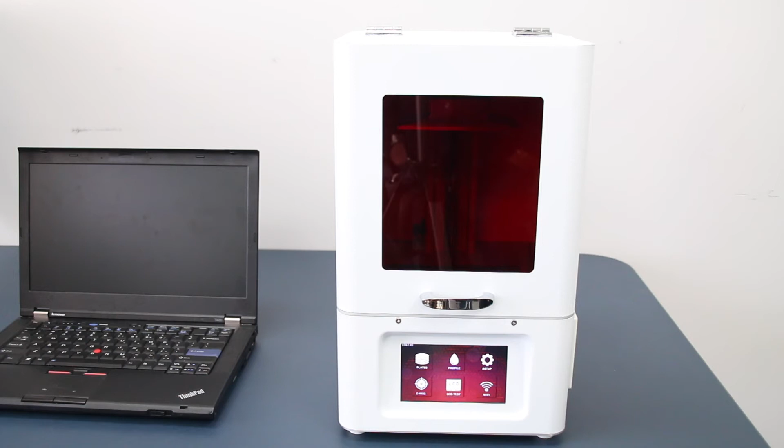Hello everyone, today we're going to show you how to use a Phrozen Sonic 3D printer.

You can connect your printer to your network in two ways: directly with an Ethernet cable, or wirelessly, which is a much easier setup. Once you turn on your printer, you will see 6 icons. Click on Wi-Fi, click on your network, type in your password, enter, and then press connect. You should see a successful message pop up.

To make sure the 3D printer is fully functional, we are testing the LCD screen.

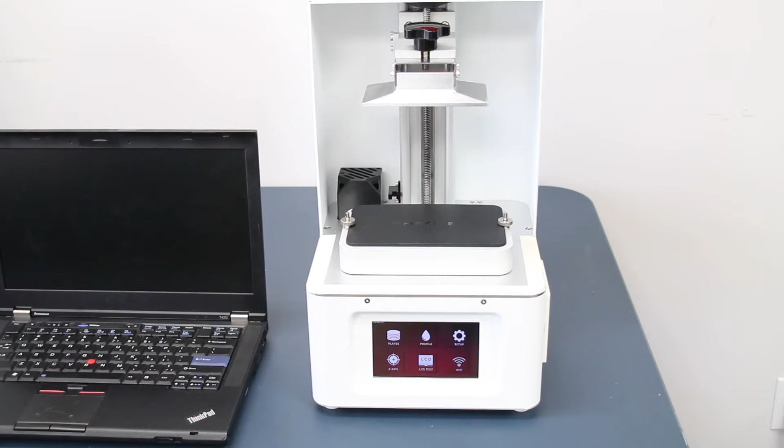To remove the vat, simply untighten the knobs and pull the vat up.

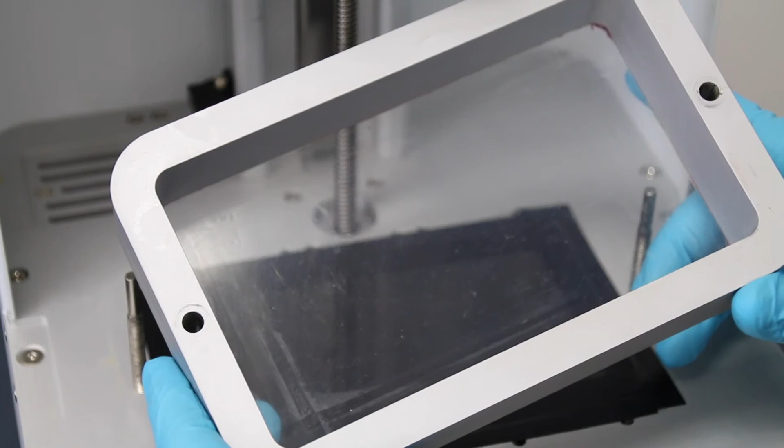Ensure your film is transparent. Ours is used but definitely usable. Once it starts fogging up, you may want to consider replacing the film. Avoid using any sharp tools on the Teflon film to prevent any leakages.

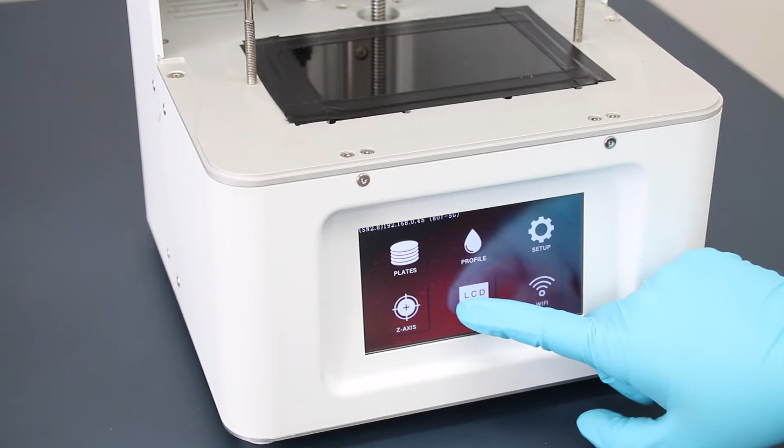Make sure you don't stare directly into the LCD screen and wear protective eyewear. Click on LCD test and click the white square in the middle.

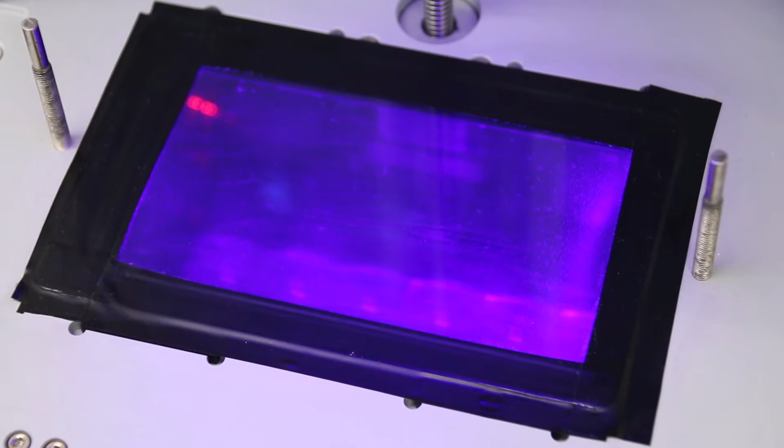Remember, the LCD screen is very fragile. Do not use any sharp tools on the surface of the screen. The LCD is also consumable, so over time it would wear down and would need to be replaced.

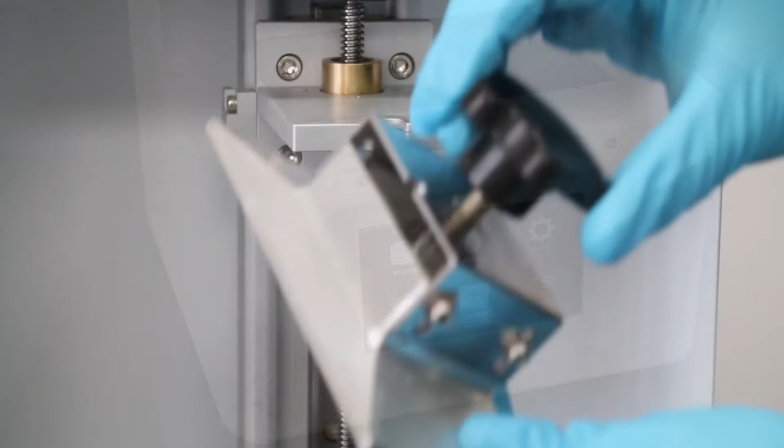To insert the build plate, always make sure the semicircle is facing away from you when placing it back in.

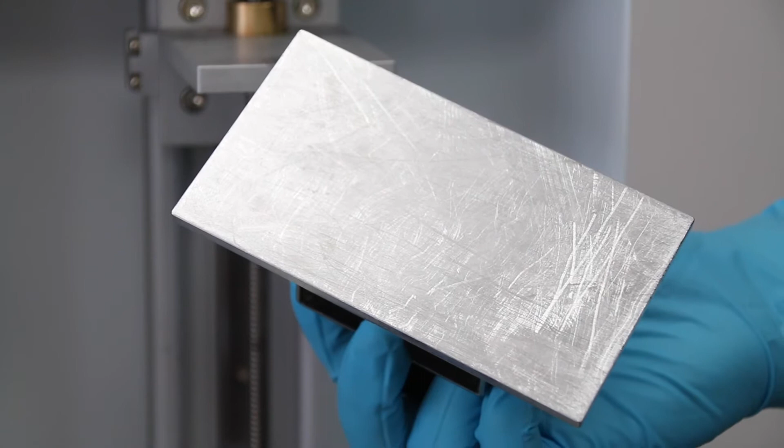Make sure you keep the surface of the build plate free of any debris. You wouldn't want anything left over on the build plate pushing onto the LCD screen. Remove all prints and make sure nothing is left over on the build plate.

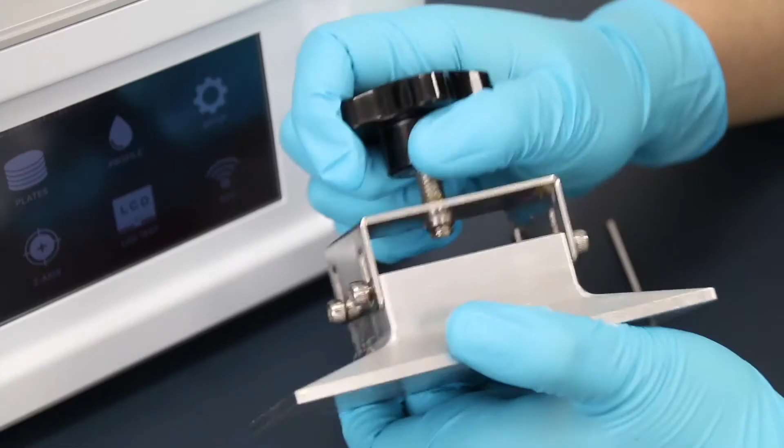Next, we're going to calibrate the build plate. Start by loosening all 4 screws of the build plate. Ensure that every screw is loosened as shown in the video. It should be a smooth transition moving it up and down.

This is a very important part of the calibration. Make sure the build plate is all the way down as shown in the video. Slide it in and tighten it up with the knob. Make sure the build plate is securely in.

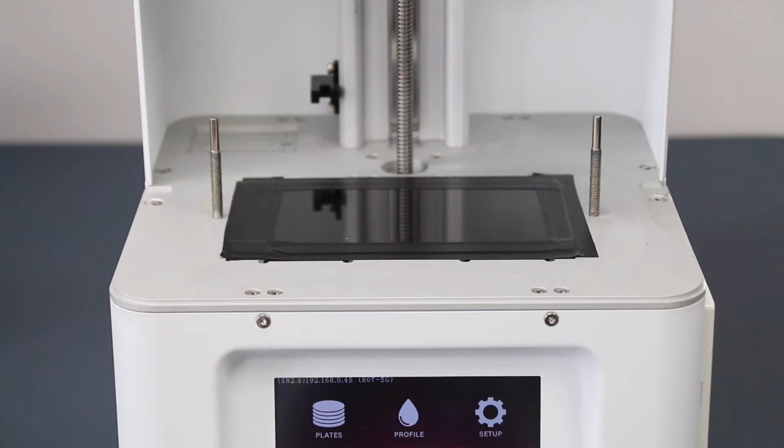Place a piece of paper on the LCD screen. This will prevent any damages on the screen. Go to the touchscreen, click on Z axis, click on the circle between the up and down arrows. Press next and the build plate will start moving down.

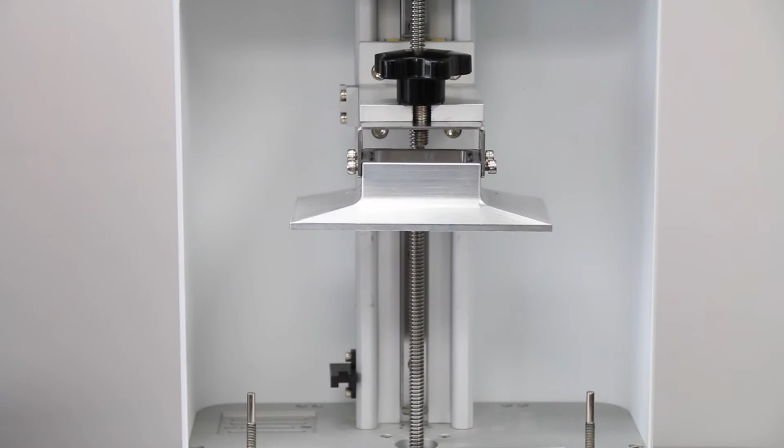Tighten the screws opposite from each other. Start with one corner, then do the opposite corner on the other side. Do this for all 4 screws.

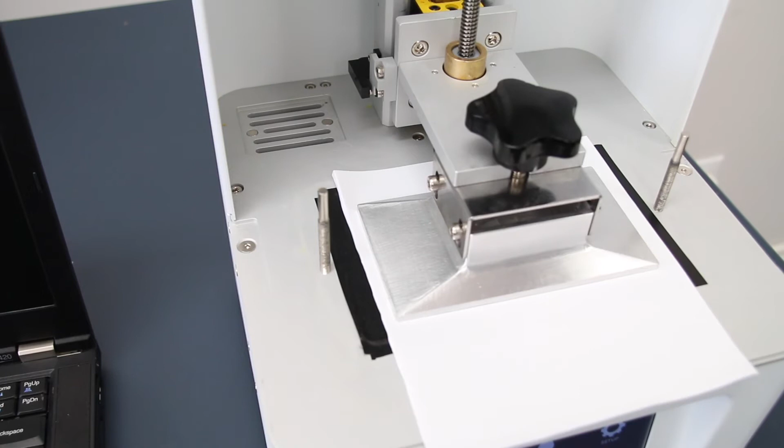The build plate will adjust itself accordingly. Give the paper a slight yank to ensure it is nicely secured. If the paper is loose, redo the calibration. Once everything is tightened, go back to the touchscreen and press done. Now the build plate will start moving up and return to its original position.

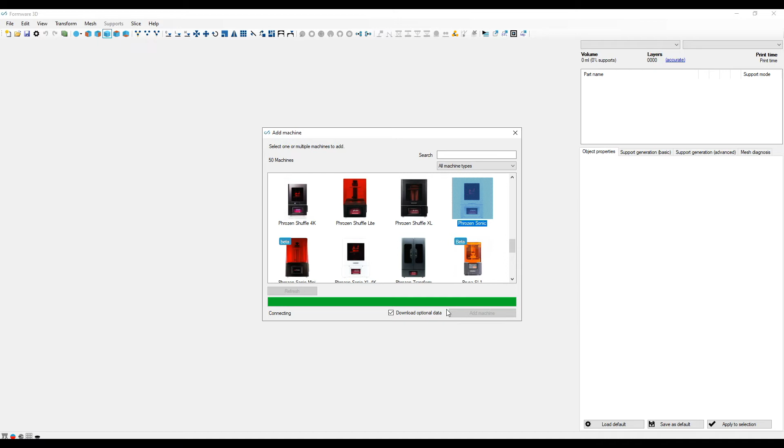Next, we're going to dive into the software. Open the software, choose your language, select which printer you have. For us, we have the Phrozen Sonic. Choose File, click Open, then choose your STL.

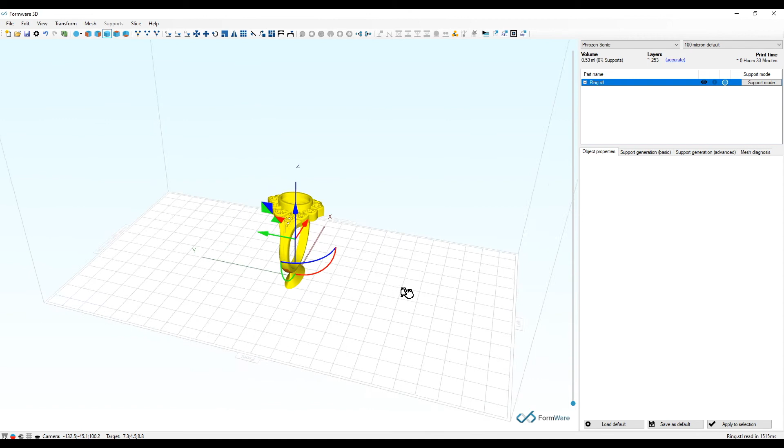I imported a simple ring and added a gate, because it's better than adding multiple supports under the ring. Right click to change the view, hold shift and hold right to pan, scroll on the mouse to zoom in and out. Select Object to move. The 3 buttons with the down arrows are for positioning the object on the Z axis.

The first button, Move to 0mm, allows you to place it directly on the build plate, typically what you want. The other 2 options allow you to place it on optimal levels for supporting. For now, we just want to make sure your STL file is directly on the build area.

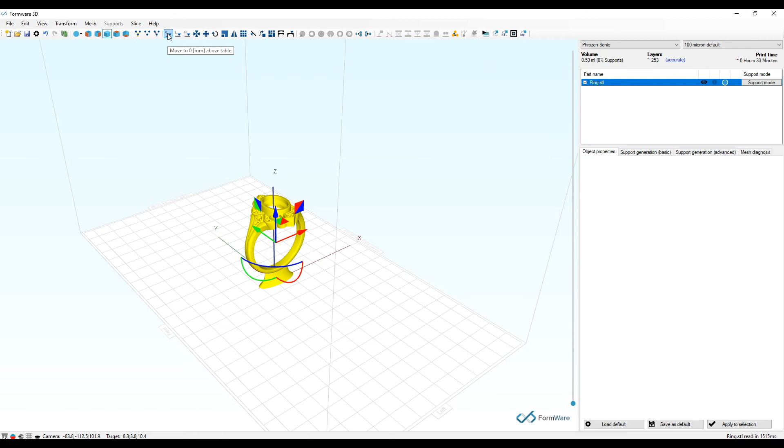So start by using the first button. To add supports, go to the support mode. Use Generate Supports to automatically make supports. There are plenty of options below to customize the automatic supports.

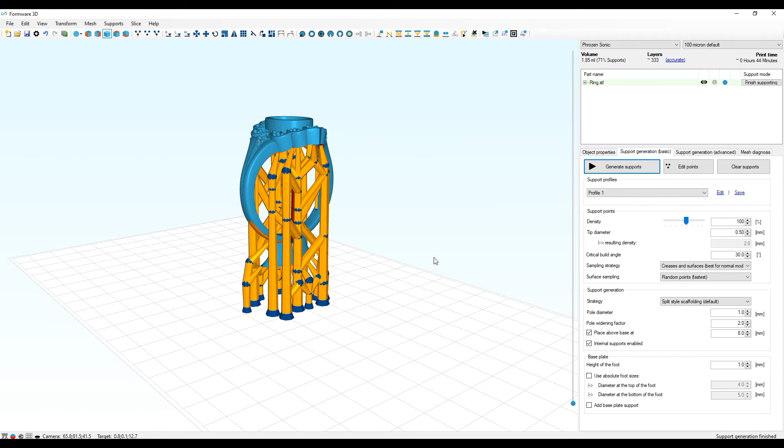As you can see, there are supports everywhere and they are not necessary. Automatic supports add supports to where they believe it is necessary. It's not the best tool to use when you have a gate. You can always reduce the amount of automatic supports with the tools below.

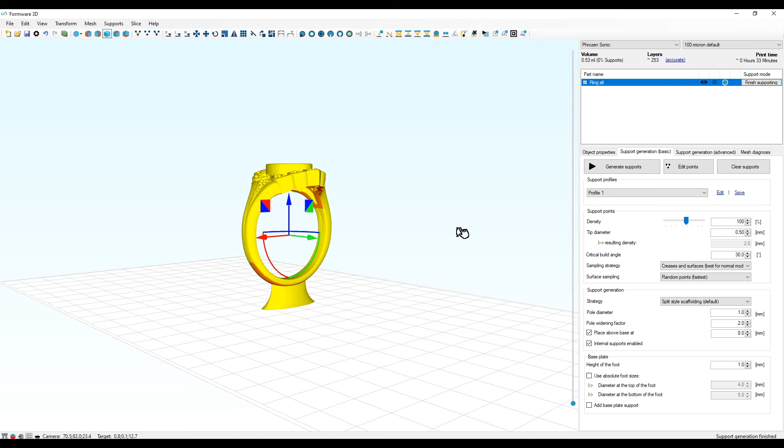I would rather add supports manually, so click Clear Supports and click to move to 0mm. Adding supports manually typically is better because you have more flexibility and control. A handy tip is to use the rail to scroll up and down on the object to see where islands are. Scroll to the point where islands are, so you know you need to add supports there.

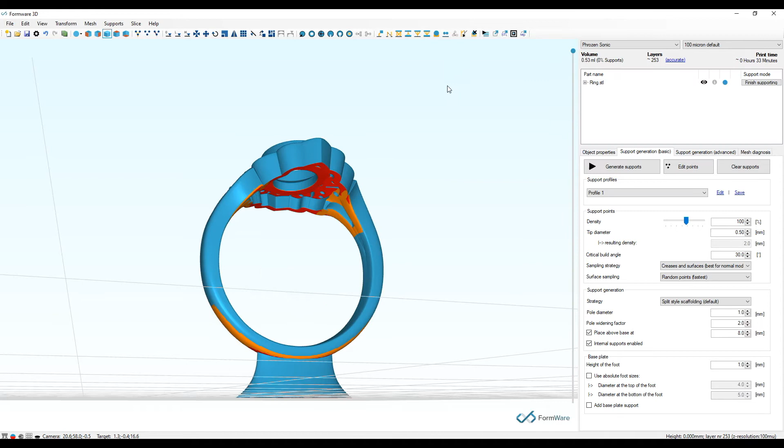To add supports manually, go to the top and select Single Support. Make sure the object is flat because we have a gate. There are also color indicators to where you need to add potential supports. Red is a strong indicator of requiring support. We know where the islands are located, so we only need 2 supports. Press Enter on your keyboard to confirm supports.

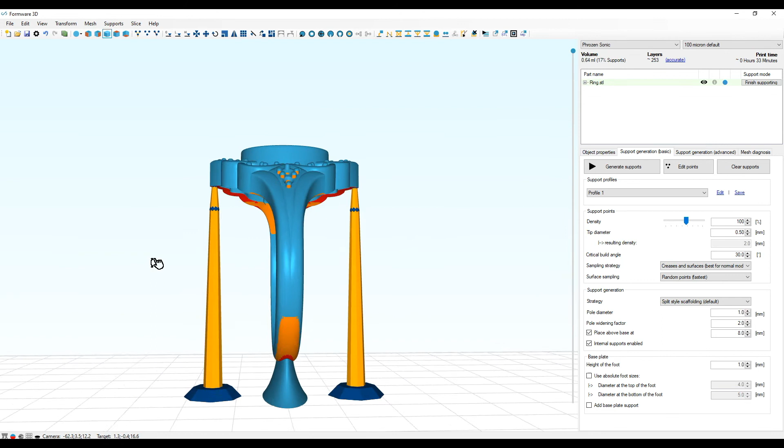I'm going to delete the current supports by pressing Delete on my keyboard. There is a handy preview tool on the bottom left corner. It should show you white lines around the object and a preview of where your supports are going to be. Once again, press Enter.

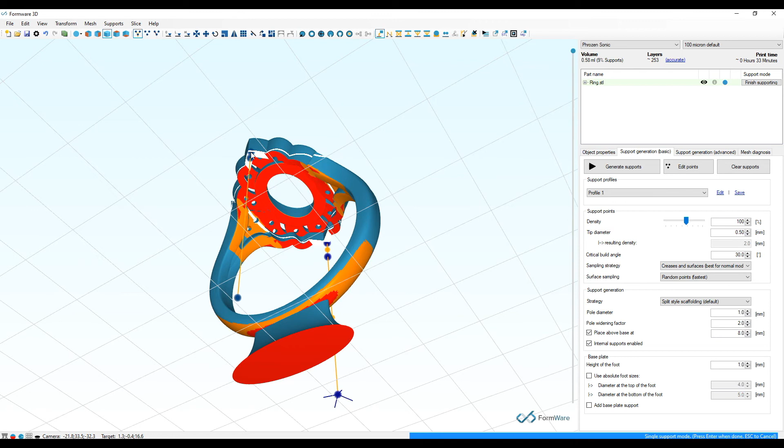You can also change aspects of the support by clicking on the points. Hold Shift and click on multiple parts to edit them at the same time. Definitely play around with these options and find out what works better for you. The default option does the trick for this file.

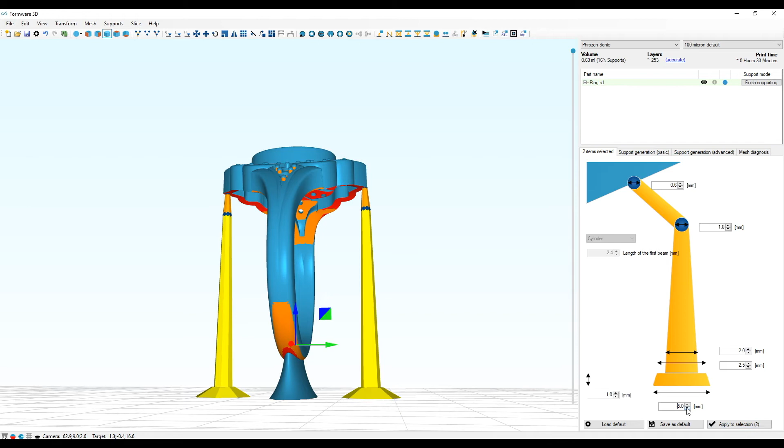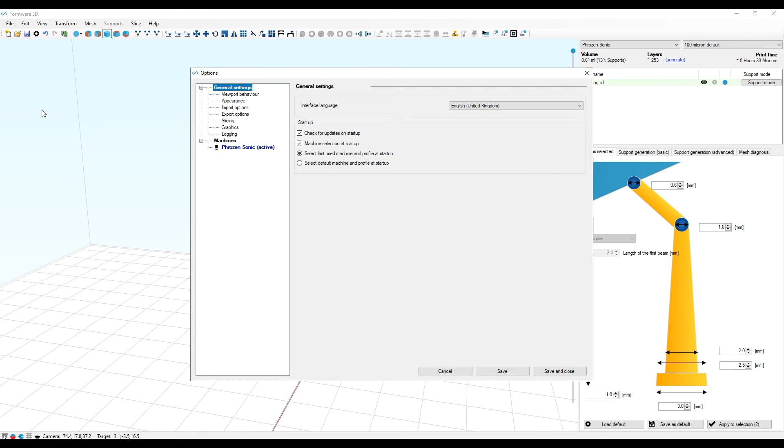Click Finish supporting. Finally, we're going to slice the file and add a bit more options for slicing. Go to File, Configuration, Machines, Phrozen Sonic, Print Profile.

Right now we only have the slicing option of 100 microns. Click New to add 50 microns and another 50 microns. For a third one, we're going to change it to 30 microns. Just click on it. Typically we use only 30 and 50 microns.

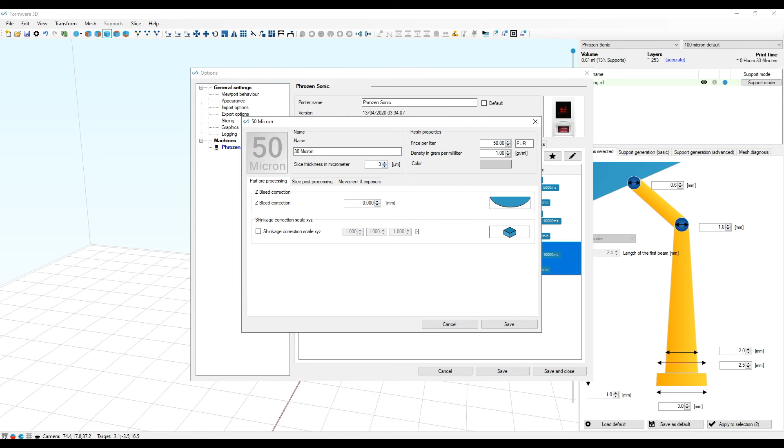The main difference between these two is the amount of time and detail it would add to your model. With 30 microns, you're getting higher detail, but it would take a lot longer to print. I would say 50 microns can handle a majority of files and prints much faster, but the choice is up to you. Finally, we can hit Save and Exit.

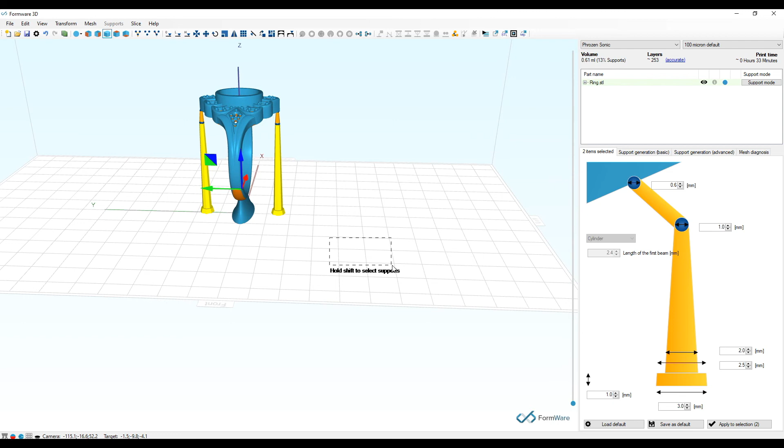Click on the top right to choose Profiles. We're going with 50 microns. Now go to the top and click Slice. It's going to ask you to save. Make a folder anywhere—typically, I keep it on the desktop to make it easier.

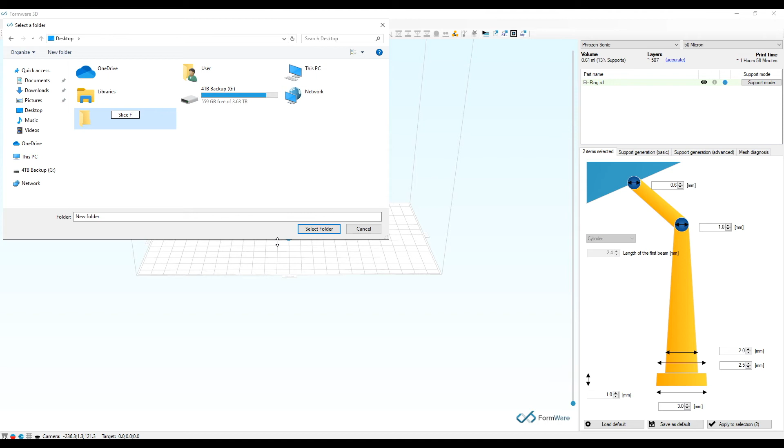Once you select the folder, you can rename your file or keep it as the default name and click Start Slicing.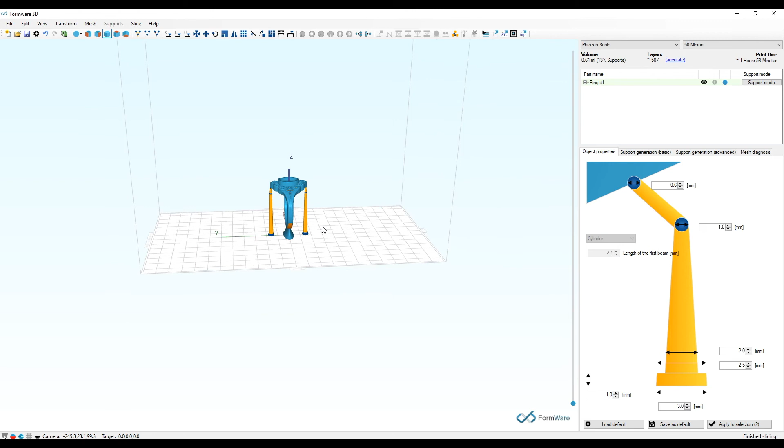Once you have your sliced file, we're going to connect your printer with the IP address on the touchscreen. You can upload directly to the machine from this point, but we're going to skip that part just to show you the entire steps. Go to any browser on your computer, and type in the IP address on your touchscreen.

Start by uploading your profiles. Go to Profiles.

Instead of typing everything manually, you can simply import the profile by scrolling down and clicking on Choose File, then Import Resin.

Once you upload these profiles, you will need to select Plates. This is where you're going to upload your files. Find your sliced file and upload this file.

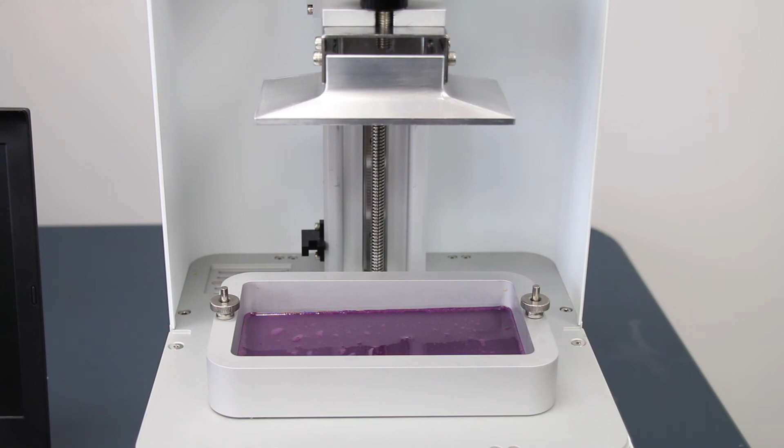Now go into the web browser and click Print. Once you hit Print, the build plate can start moving down and your print can get started.